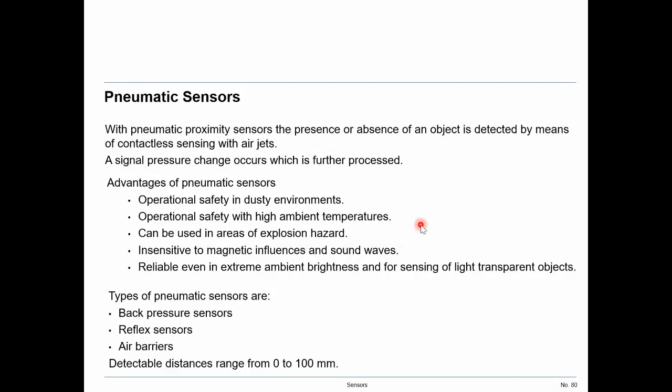Of course, there are also some types of pneumatic sensors, like back pressure sensors, reflex sensors and air barrier sensors, similar to the optical sensors, but we don't use electric energy in pneumatic sensors. We use pressurized air. The detectable distance ranges from 0 to 100 millimeters. Okay, let's see the pictures of pneumatic sensors.

You see here, this is a back pressure sensor. Here the distance is 0, and P is the pressurized air coming in, and the reflected pressurized air goes out. So in and out, you see pressurized air and the answer, the reflection here. You see the distance is 0.5 millimeter, and this we call a back pressure sensor.

That means there is, let's use another color here, a barrier, and if we apply the pressurized air like this, let's use the color, all right, if we apply the pressurized air to this surface, then it reflects back from here, and we sense the back pressure. So this is the A, and this is the P, pressurized air, and this is the answer for that.

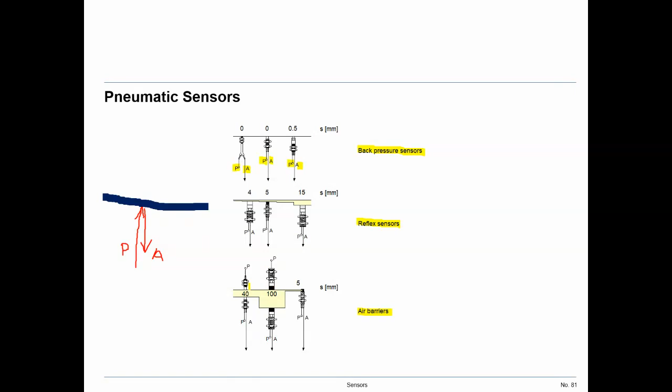And here we have air barriers. That means the sensor consists of two parts. One of them is the sender, the other one is the receiver, or emitter and receiver. So here we have the pressurized air, here we have the pressurized air, but also the answer. And in between, if there's a material, an object, we can detect it.

So let's check the working principle of the back pressure sensor. You see the pressurized air comes in here, like this, and flows to the object here. You see here this sealing element, the seal here, the black one. And if there's an object in front of the sensor, let's say like this here, the pressurized air cannot go through, so it reflects from the object, like this here. So it comes in, there is no way out, and then it reflects in this direction.

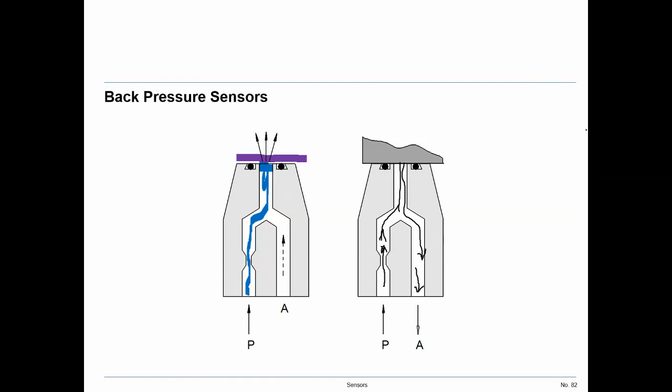So since there's a pressure in that direction, the cross section here is reduced because the pressure cannot go back. So we need the pressure here. That means the back flow in the back direction has a resistance; it's difficult to flow in the back direction. So it has to flow in that direction, and if it is flowing in that direction, using a sensitive membrane or any pressure feeler, we can detect that there is an object in front of the sensor.

So the back pressure sensors we can also use for applications where we want to check the level of water or any fluid. If, for example, the pressurized part of the sensor is in the fluid, then the air cannot flow easily. So there is a resistance coming from the fluid. So then the pressure can immediately come back and go in that direction.

So then there is a pneumatic-electric converter. That means the pneumatic signals are converted into electric signals via the contact here, the open contact. So then we can get signals that there is an object which doesn't allow the pressurized air to flow. So in that way, using this principle of the air, we can check whether the water has arrived at the maximum level or not. The level of the water can be checked.

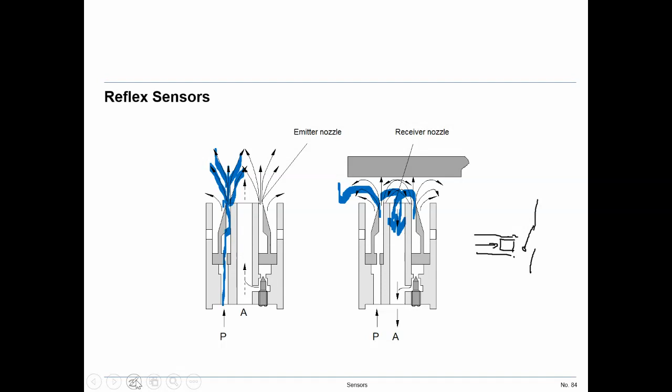And of course, we can convert the pneumatic signals into electric signals. It is also not difficult. There is a converter like this. We have here our pressurized air, and this pressurized air can operate a piston like this, and then the piston can operate a contact like here, a normally open contact. And let's use the red color here: 24 volt direct current plus, and here we have the signals going in that direction.

So if the pressurized air operates the piston, and the piston is connected somehow to the open contact, then it gets closed like this, and we get the signals. That means we convert the pneumatic signals into electric signals. Because in the control system we cannot use pneumatic signals. In the control system we have electricity and 24 volt control voltage. So therefore, if we have to use the signals in the control system, they must be converted into electric signals.

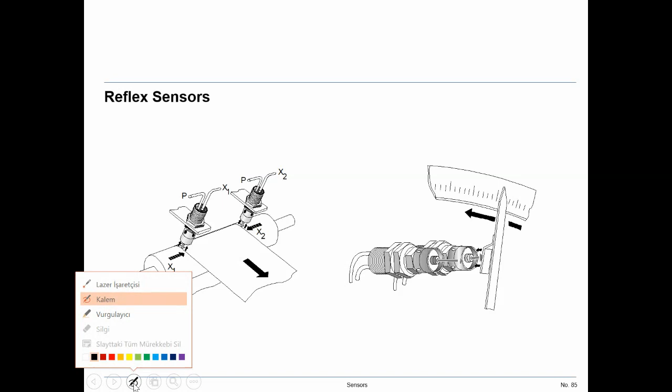So here is an example for the reflex sensor. As you see here, there's a reflex sensor. Like this here, there is paper or anything. Here you see. Okay, here. This is the paper or sheet metal, could be sheet metal, any flowable material like this. And we have sensors here.

So those are our sensors here located. The sensors, and you see if there is a problem with the axis of this rolling part, like this is the axis here, you know, this going through here.

So the axis must be really horizontal. So that means if you have a problem with the axis regarding the parallelity, so this is the axis here, and regarding parallelity, that means the band can move in that direction or in that direction. And this is not allowed.

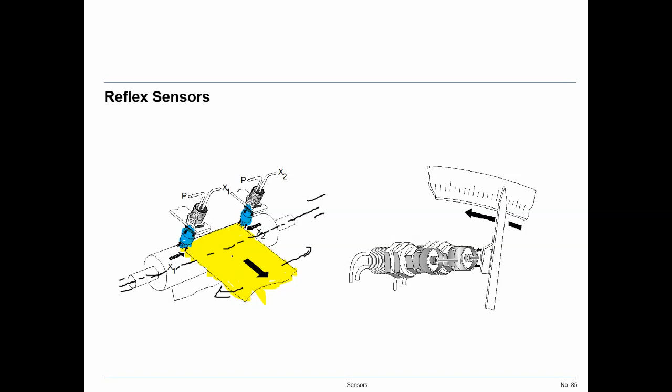This we don't like. So therefore, the two sensors are checking the edge of this sheet metal or the paper, and that means the sensor has to check the edge of the paper or the material flowing, and this also.

So then, if, let's say, the paper or the sheet metal moves in that direction, then this will give signals and say, I don't see the material. Or if in that direction, this sensor will give the signal and say, I don't see the material. So in that case, we can adjust this axis here.

There's a mechanism, and this mechanism can adjust up and down. So in that direction, it can adjust the position of the axis so that the material, say the sheet metal or the paper, can flow properly. Okay.

So the air barrier, another pneumatic sensor is the air barrier, like you see here. Air barrier, and the air comes in that direction here, this is the pressurized air and can flow back in that direction here, and the same here, in the opposite direction.

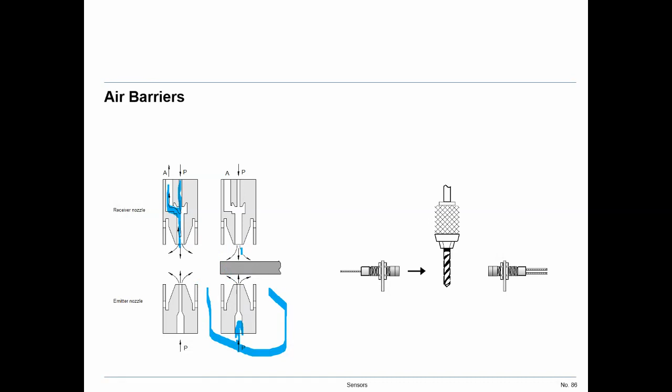That means the sensor consists of two parts. In this part, we have the pressurized air coming in, and the pressurized air can go through here. So if there is an object here, it cannot go through, so then we can check it. It is like the light barrier sensor. And we can use these types of sensors, for example, to check any object. Is it broken or is it okay?

So you can imagine we can put the heads of the sensors opposite to each other, and then if this part gets broken here somewhere, the communication between sensors is established, so then we can understand that there is no object in between, so the receiver can get the sender's signals. So then we easily understand that, in this example, the tool is broken.

Okay, so once more, pneumatic sensors we use mainly in a problematic environment like dust and heat, and maybe electricity is a problem because of explosion. And in those cases, we prefer to use the pneumatic sensors.

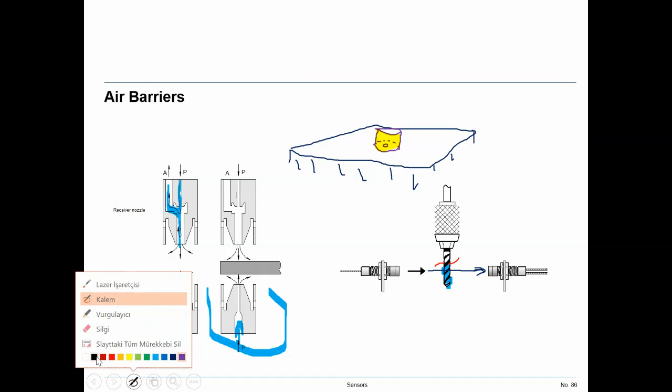And we can use a pneumatic sensor under these. So this is the sensor. Maybe we can use this sensor here, like this one. And the sensor sends the air through here to this material. And if the material is on the surface, it reflects the pressurized air back to the sensor, the back pressure sensor. With the back pressure sensor, we can check whether the material is there or not.

And of course, the surface must be very clean, very smooth, so that we can detect this material with pneumatic sensors. And it doesn't need any electricity. Of course, it needs the pressurized air connected, but doesn't need electricity or hydraulics or anything else. Quite robust, and we use it.

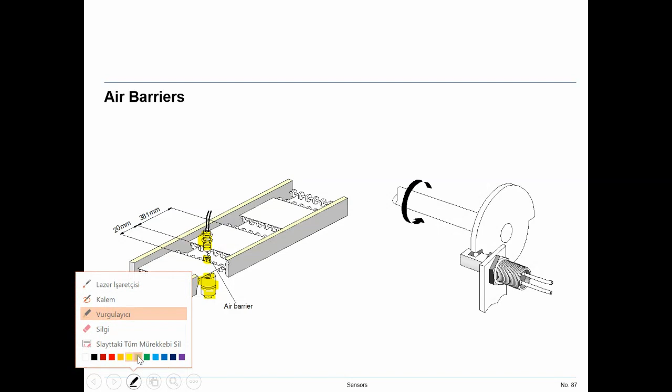Another application we have here. Here you see this is our sensor, the big air barrier sensor. And the other sensor is on the opposite side, in front of this part. So if a sheet metal goes in between, let's say this is the sheet metal here, or paper or anything is flowing.

Then you can easily imagine that the material interrupts the communication between the sensors while the pressure is there. So then the sensor can give signals and say, there is something I detected. It's also a way we can use the pressurized air. So those are the materials. Could be sheet metal or paper or anything, depending on the application. Okay.

Here we also use the air barrier sensor to check. Let's say this is a cam, and you see the part of the cam here, like this is the part. So the pressurized air can detect this part.

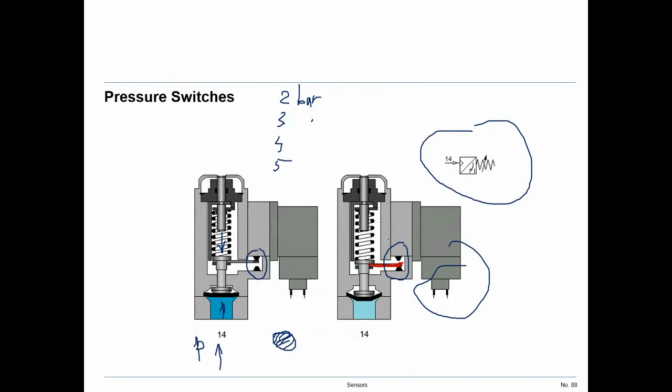If you want the signal at 2 bar, we can adjust it using the arrow, or 3, 4 or 5 bar. So now we will talk about the pressure switches. The pressure switch is also a type of sensor. Therefore you see these sensor symbols here. And you see also the contact here, normally open like this.

It works like any other sensor, but we have here 2 cables, 2-wire technology. One of them is the brown, connected to 24-volt direct current, positive, and the other part is the negative.

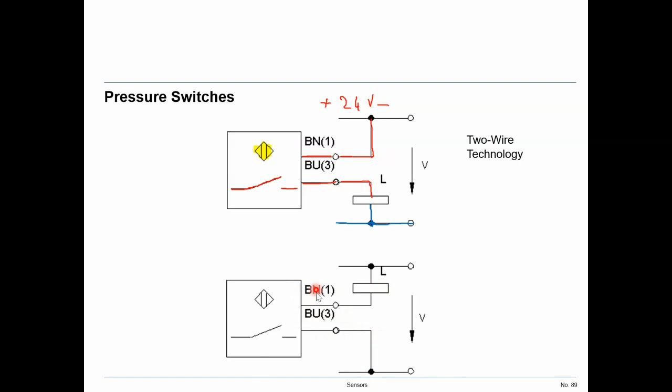And there are 2 types. We can put the load in this part of the circuit or in this part of the circuit. But it's still brown and blue here. Down is blue and this is brown. I mean the 24-volt direct current; the other one is connecting to the earth.

So this was 2-wire technology. So this is important to know, 2-wire technology. That means there are 2 wires here. And next we will discuss 3-wire technologies. 3-wire technologies means the sensor has 3 wires like this.

And the first one is the red one here, like this, brown, 24-volt direct current, and the other one is the blue. So the blue is the ground, 0, and the black is the cable that delivers the signals from the sensors. Let's choose this, the black one. Okay. It's too much, huh? So, it's much better.

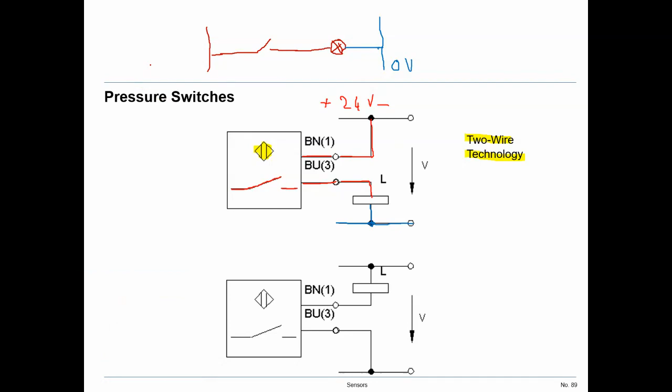Switch means it works with a contact. So we have here the 24 volt connected to the normally open or closed contact, and then it goes through. So here 24 volt, and here maybe you have a light or anything like this. So this is the ground part, 0 volt, and this is here 24 volt direct current, plus. So this is a switch, and the pressure switch works like this.

But the connections, if we talk about sensors like inductive, capacitive, or optic sensors, since they are electronic equipment, they have 3 cables, or 3-wire technology. One of them is the connection to the 24 volt direct current. The other one is the connection to the ground, 0 volt, and the black one. The colors are also standardized, so the standard is also important. The black one is for the signals.

If the sensor is active, if the sensor detects something, the sensor delivers the signals, and then we use these signals, for example, for the coil or any other object. And there are 2 different types of 3-wire technology. One of them, I'll show now, is PNP normally open. As you see here, this contact is normally open. What is PNP? That means positive, negative, positive. So here the load, the object, is connected from the positive to the ground.

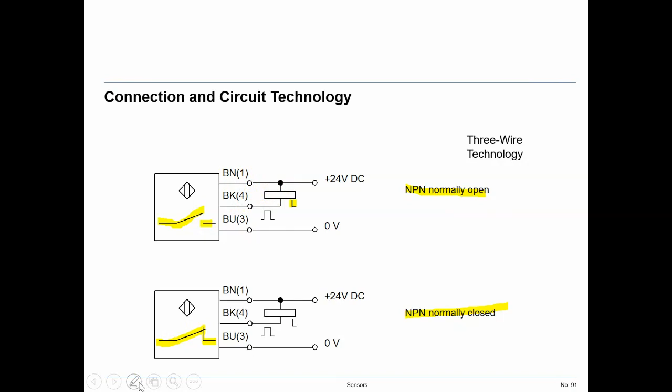So that means between brown - let's choose this color brown, we have the brown. Okay, this is the black, and this is the blue. Blue we can check here - this is the blue one.

So the load, I mean the object, could be a coil or any light and so on. It must be in between 24 volt and the black cable, signals cable. And here also the same. But what is the difference in between?

Here we have normally open contact. Here in these sensors, we have normally closed contact, as you see here - normally closed contact. So against three cables: the red one, blue one, and the black one. And the load is connected, in this case, between the black and the blue.

Here, use another color, it's important to use it in between here. You see the coil or the light has to be connected between black and blue. So in NPN, between 24 volt and the black; in case of PNP, between black cable and the blue cable. So this is the main difference.

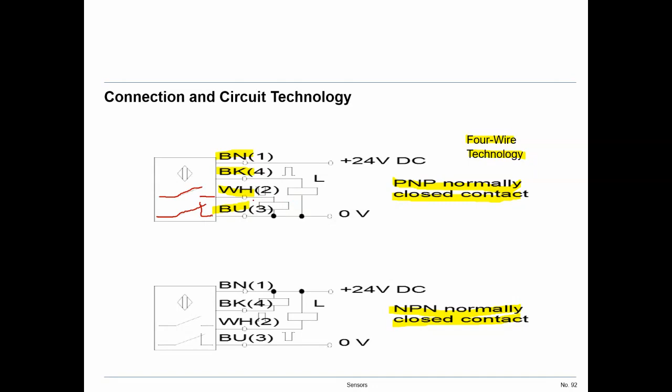So that means if we use the normal open contact, then we have to use the coil or light - this is for normally closed contact, and this is for normally open contact. So if we use normally open contact, we use the cable black, brown, and blue.

If we want to use the normally closed contact, we have to use brown, white, and blue. So brown in any case, because this is the 24 volt direct current. And for the normally open contact, we use brown, black, blue; and for normally closed contact, brown, white, and blue. So this is the same here.

And this is PNP, and this is NPN. So you see where we connect the load - the coil or the light - the location changes depending on PNP or NPN, positive-negative-positive or negative-positive-negative. But if we have 4 cables, the reason is we have 2 contacts at the same time in the same sensor - one of them is normally open, the other is normally closed. Depending on the expectation from the control side, we can use normally open contact or normally closed contact, or both of them as signal elements.

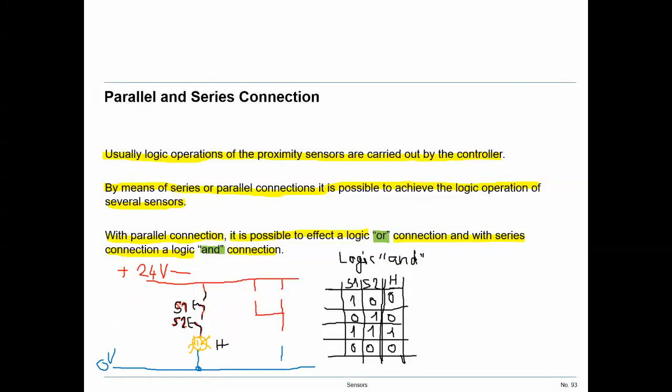What means OR, and how is the circuit regarding the OR? We can say, okay, let's use that. We have S1 here, S2 here, and we connect all of them. And here somewhere we have our light, and then the blue connections here, like this. So our light is somewhere here located. This is the H, light.

And here our push button, normally open contact of course, this is S1, and here again, normal open contact, push button, S2. So let's create a table here, and let's have 1, 2, and 3. So this is our S1, and this is our S2 button, and this is our light.

So again we have four different situations, like this: if S1 is pushed, that means it's 1, and the other is 0. And if S1 is 0 and S2 is 1, or both of them are 1, or both of them are 0, that means not operated, not pushed. So this is logic AND - we are writing now logic OR. Logic OR. So OR.

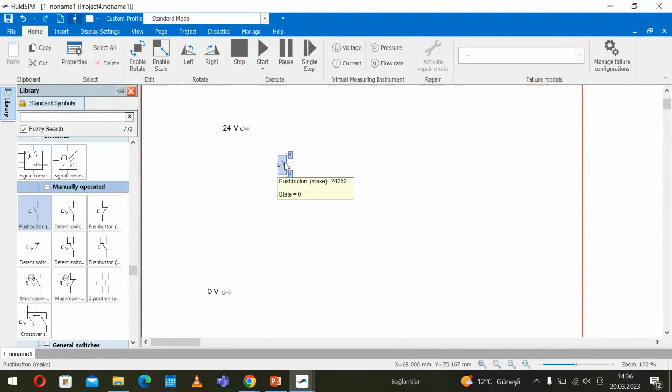Okay, now here, let's establish the circuits. Here we have 24 volt, and here we have our 0 volt. And let's establish the contact. Where are the contacts here? So normally open. And this is S1, normally open, okay.

So let's copy and paste. I hope, okay, S2, right, okay, it's correct. And a light we need somewhere. Light, where is it? Here, okay, indicator light, okay. Ah, 90 degree turn. Okay, here.

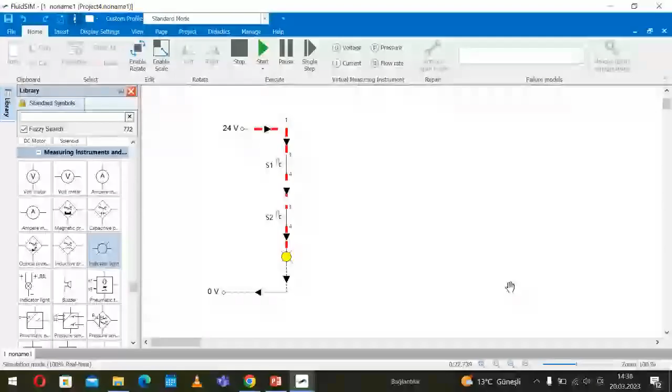And let's connect them like this. We have connected these two signal elements, S1 and S2, in series, you see, in series. So then if you start the simulation, if I push S1, light doesn't get on. If I push S2, also light doesn't get on. But if I push both of them, S1 and S2, you see light gets on. There's one case and there is only one case. So S1 and S2 must be operated at the same time, I mean must be operated to get the output 1.

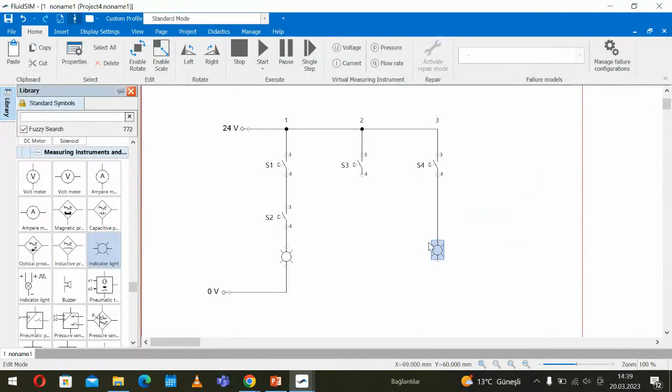But in case of parallel connections, let's use this and let's establish the other, and parallel connections here. So then one more, copy and paste here like this. Okay, here we connect parallel to connect two signal elements, S3 and S4. Okay, and the light has to, we need also the light here, and it's somewhere here. Okay, so then it has to be also connected to here. Okay, and this like this connected parallel.

Okay, let's see what happens. So in case of OR connections, here we have OR connections. One of them is enough of these signals, S3 and S4, to get the light on. So you see, if I push this button, light gets on. S4 is not operated. If I push S4, light again gets on. So this is the OR connection, S3 or S4. One of them is enough to get the light on. But if we connect in series, two of them must be operated. One of them is not enough to turn the light on.

Okay, let's come to the PowerPoint presentation. So this is the logic AND table, and this is the logic OR table. It is not so complicated. I hope you understood that.

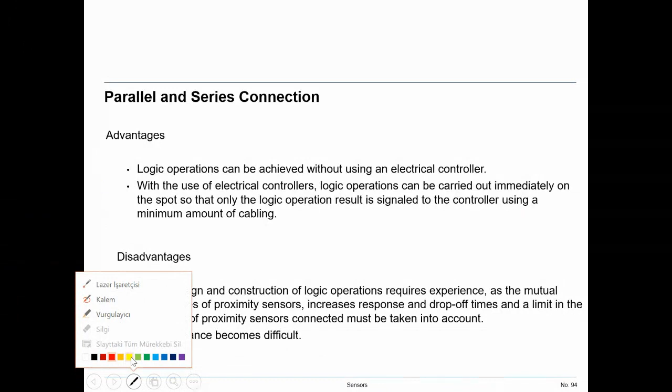Then let's continue. Parallel and series connections. What are the advantages and what are the disadvantages? So the advantages and disadvantages: logic operations can be achieved without using an electrical controller.

With the use of electrical controllers, logic operations can be carried out immediately on the spot, so that only the logic operation result is signaled to the controller using a minimum amount of cabling.

Disadvantages: the design and construction of logic operations requires experience, as the mutual influence of proximity sensors increases response and drop-off times, and a limit in the number of proximity sensors connected must be taken into account. And the other one is the maintenance becomes difficult. Disadvantage: parallel or serial connections.

But in a control system we use, if we want to solve this problem, AND and OR connections, logic OR and logic AND. If you use the contact, we can really realize this logic AND and logic OR, like I have shown in the simulation.

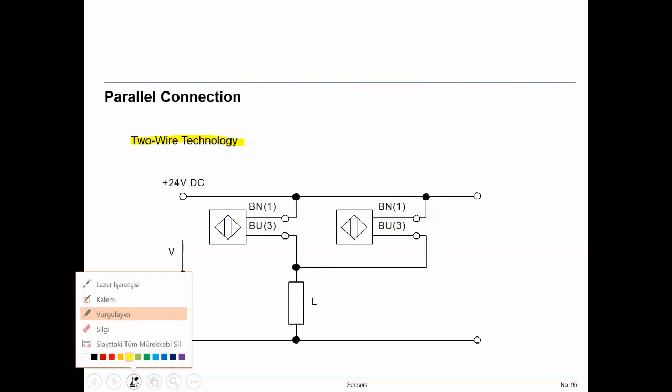So there are parallel connections here. You see, two sensors or two switches are parallel connected. Again, two-wire technology - two-wire means each sensor has two wires. One of them is the red one here, connected to the 24-volt direct current. And the other one is the blue one, huh? So this is the blue one here.

An answer? Let's say this is the sensor or switch 1 and switch 2. If one of them is operated or detects something, and there's a light here or anything else, the light gets on if one of them is operated. And therefore, this is the parallel connection, two-wire technology, parallel connection.

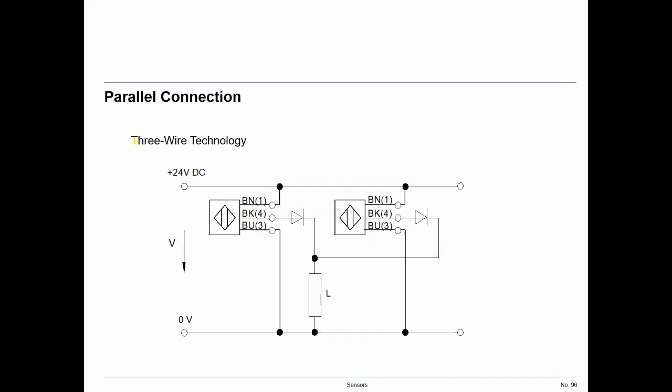So the next one must be serial connections. I hope here, okay, yes. And we have here three-wire connections, you see, and parallel connections. Three-wire connections: here we have the 24-volt direct current, which is connected to the sensor via brown cable, like this, and this is blue connected to the blue one. This is the blue here, you see, and this is also blue connected to the ground.

So, and here this is the three-wire connection. So you know the blacks are the signals coming from the sensors, and if these signals come, the light gets on, like this here.

Let's say this is the light, our light, connected here. So if one of these sensors is operated, delivering the signal, the light gets on, or here if these sensors are operated, the light turns on. So this is again parallel connections, like our previous example. This is 2-wire connections, like a switch, and this is 3-wire connections, like sensors.

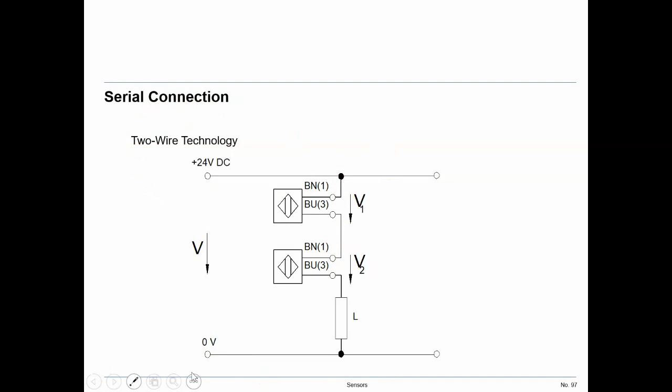Okay, so let's come to the serial connections. Again 2-wire connections, but in serial. What does serial mean? So we have here 24 volts direct current, and this is connected by the brown cable to this switch. And here we get the signal from the switch if it is operated, if it detects something.

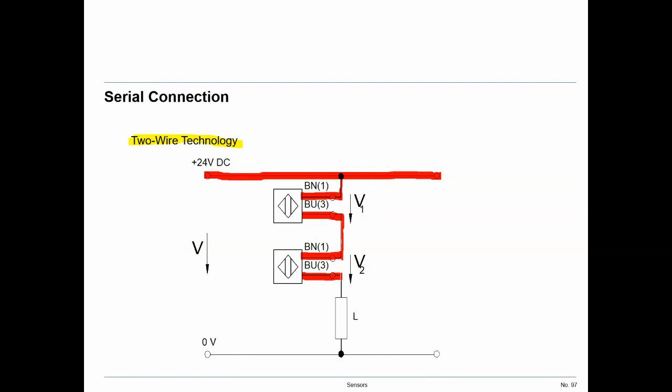It goes to the next sensor or switch, connected to the brown cable, that means 24 volt. And from this sensor, the current flows into the load, into the light, let's say. So this is our light here, and the light gets on, or the coil or anything. And it is connected to the ground, 0. Okay, this is 2 cables in serial connection with 2-wire technology.

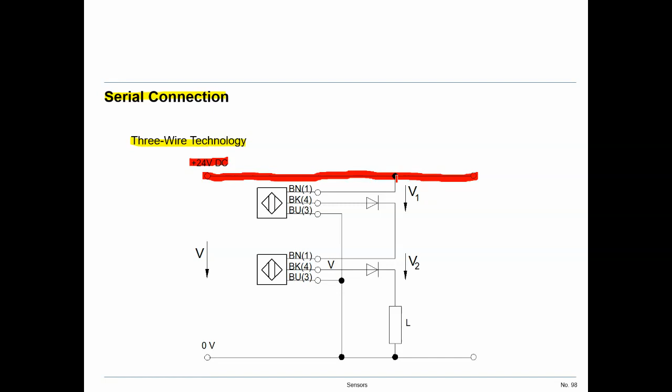Okay, serial connections with 3 cables. Again, serial connection, this is the logic AND, with 3-wire technology. If you have 3-wire technology, how can we connect it? It is also not so difficult. We have here our 24 volt direct current, and this 24 volt direct current is connected by the brown cable to, let's say, sensor 1.

And we get signals from sensor 1. Let's write here sensor 1, and let's choose the color black. This is sensor 1 and sensor 2. All of them are connected to the 3 cables. Let's use the blue color. So the blue one is connected to the ground here, and this is also connected to blue. And this is our 0 connection, ground.

Okay, so you see the signals are connected in serial. Which are the signals here? Those are the signals. As you see here, the signals are connected. This signal is connected to sensor 2 as 24 volt, because if sensor 1 is active, it delivers the signal at 24 volt, and this 24 volt is connected to sensor 2.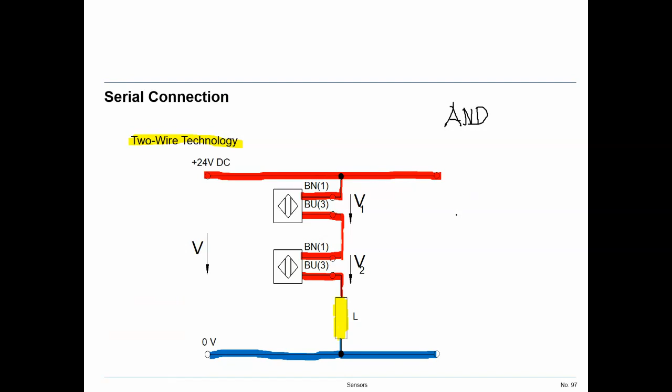This is also an AND connection, 2-wire, as you see here. And this was the OR connection, 3-wire, logic OR, and also OR with 2 wires. So: logic OR with 2-wire technology, logic OR with 3-wire technology, logic AND with 2-wire technology, logic AND with 3-wire technology. Okay.

So, selection criteria. How can we select? They can be selected according to the material which they are to detect. So first of all, detection, of course, we mean the sensors. How can we select these sensors? And it is very essential, actually, in industry. If you start your professional life, you will face those types of problems.

If you are employed in the design department or automation or maintenance or a project, I'm sure somehow you will face the sensor problem, and at least you will be one of the team that has to discuss the sensor application. So sensors can be selected according to the material which they are to detect.

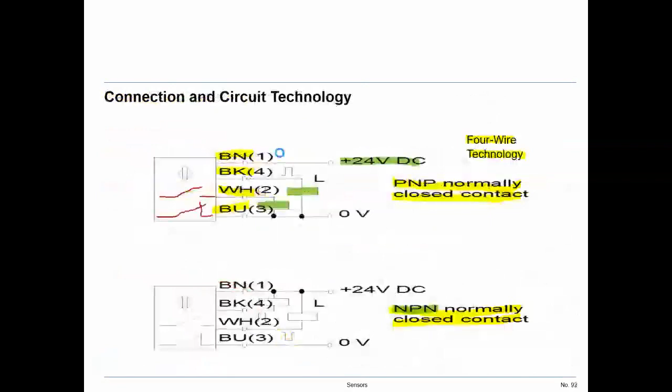Okay, through beam sensors, and let's come to the... okay. Oh.

Capacitive proximity sensors are suitable for the detection of a wide range of materials, but again, only for relatively small distances, similar to inductive proximity sensors.

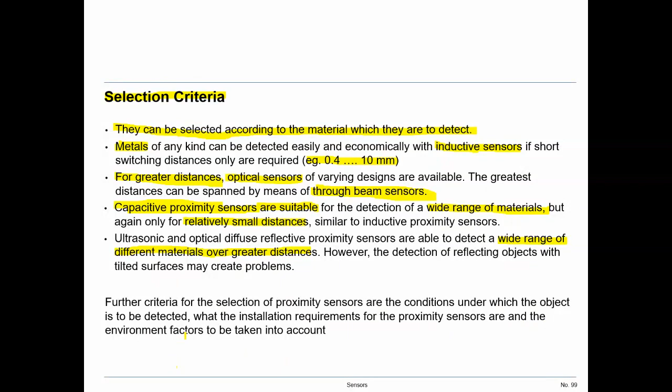Further criteria for selection of proximity sensors are the conditions under which the object is to be detected, the installation requirements for the proximity sensors, and the environmental factors to be taken into account.

So in order to select sensors, if we want to detect a magnetic field, we use magnetic sensors. If we want to detect metal or different types of metal, we use inductive sensors. If we want to detect any material except air, we use capacitive sensors. But we also have to consider the detection distance.

If we have a wide detection distance, then the optical through beam sensor is recommended. The installation requirements and the environment are crucial. So in summary, the selection criteria are: object materials, conditions for detection of objects, installation conditions, environmental conditions, safety applications, and options and features of proximity sensors.

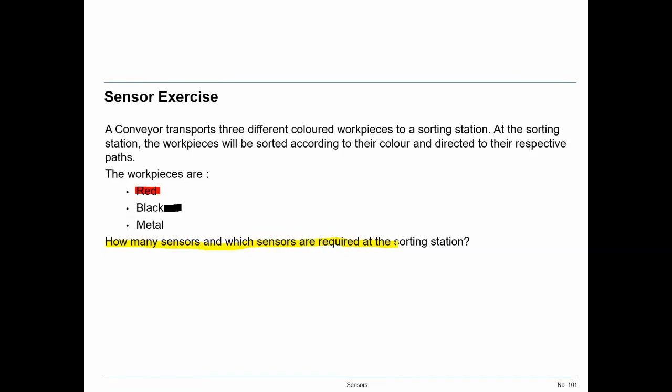And the other one is metal. Let's leave it as metal. So then, how many sensors and which sensors are required at this sorting station? We have to sort the different colors: one is metal, one is black, the other is red. Metal here is the green.

At this sorting station, we have to use some sensors to sort the materials according to which is red, which is black, and which is metal. In the next lesson we will discuss that. I will expect some answer from you, a solution or your idea.

So then we turn to the network. We finished the sensor part, so we start the network. What does network mean? We already discussed the topics actuators and sensors. Now we are in network, and after network we have hardware and software. So what is a network?

You may remember we said, let's have a linear actuator like this, a pneumatic linear actuator, and let's have two sensors on the actuator in order to check the position of this piston. This is 1B1, and this is the second sensor to check the advanced position. This is 1B2, and there is a valve we use to drive this piston. The valve is, as we learned already, a 5/2-way valve.

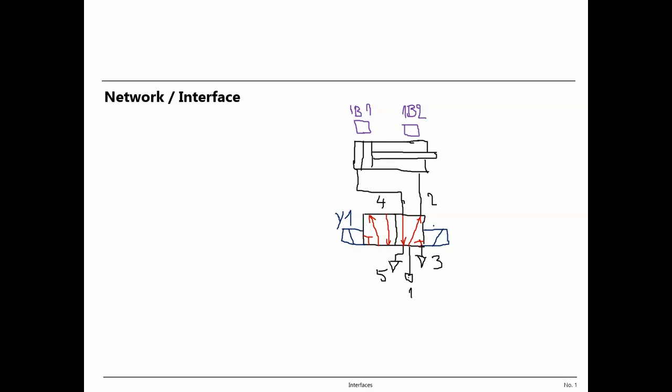Okay, so we need a control system for that. Let's establish the control system. For the control system, this is the power circuit. For that we need 24 volts direct current, 24 volt DC plus, and then we need, of course, the blue line here. This is the 0 volt. Okay, then let's establish the circuit.

If I push start 1, this is start 1, then Y1 has to be connected here. This is the coil Y1. And if I push start 2, let's say this is S1, start 1, and this is S2, this push button here, then coil 2. This is the coil symbol, and another coil here, this is coil 2, like this. And this is Y2, coil 2, and let's establish the connections using different colors.

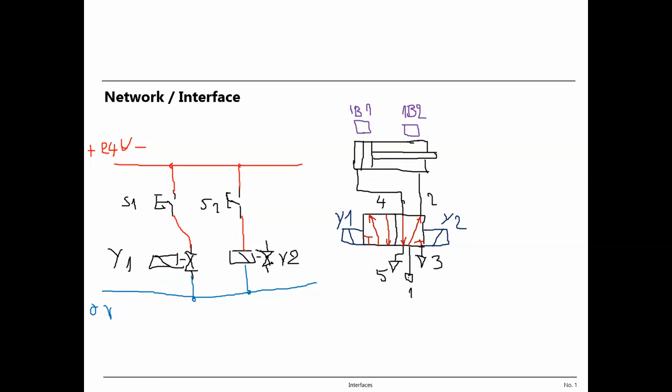Let's say the red one for the current, and this is also the current here, also connected here and there, and we use the blue color to connect the ground here. Okay, so if I push S1, Y1 will be active and the piston moves forward. If I push S2, then Y2 will be active, so the piston moves to its initial position.

And there are signals here, the signals from the coils and from the sensors. The sensors also have to be connected to the circuit, and the sensors have to be indicated here somewhere. But there is not much space. I will do it with the simulation software.

You will see that, and you will see the network. Network means cabling. That means the signal transfer, the way of signals coming from the environment of the machine or going to the environment of the machine. So I'm going to use the simulation software and I will show you that.

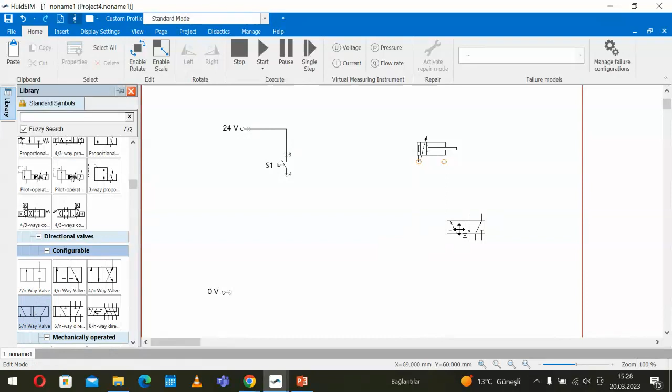Here, so let's take it away. This is not needed. Also not needed. But S1, S2 we need, I guess. S1 we need, not S2. Okay, so this is also not needed. Here not needed. Very fast. I can draw our pneumatic cylinder like this here, a pneumatic cylinder, and add two sensors. Okay, that's the valve to operate the cylinder like this.

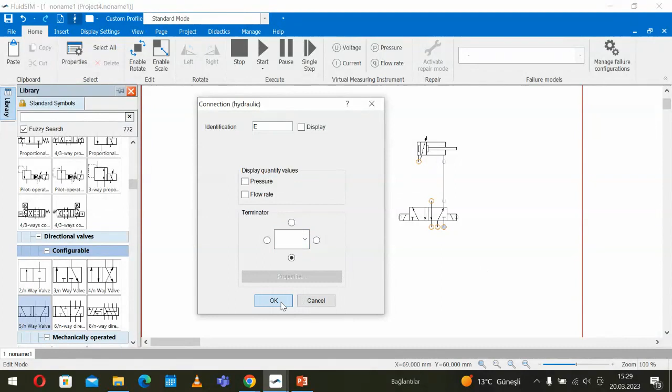Properties, configuration, let's select two coils, and not manual, it must be electric here, also electric. So then finished, and here we need the shock absorber. How was that? Is it hydraulic? Oh, this is terrible. Actually, I wanted pneumatic, not hydraulic. I made a mistake, sorry. I have to use the pneumatic. So then the valve from pneumatic, okay.

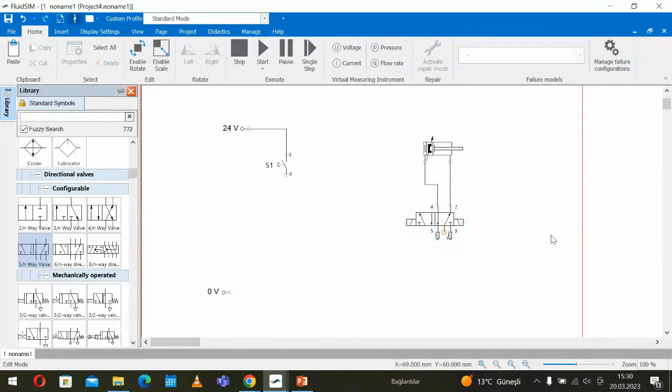So here, properties, configuration, let's say electrically actuated. Then here the properties, this is exhaust 3 and exhaust 5 also here, and this is the air. So let's connect here, there, okay, good. Then move to the side here, and then we need the air source. This is the air source here, and we need also a 3/2-way valve. Where is it? Here, okay.

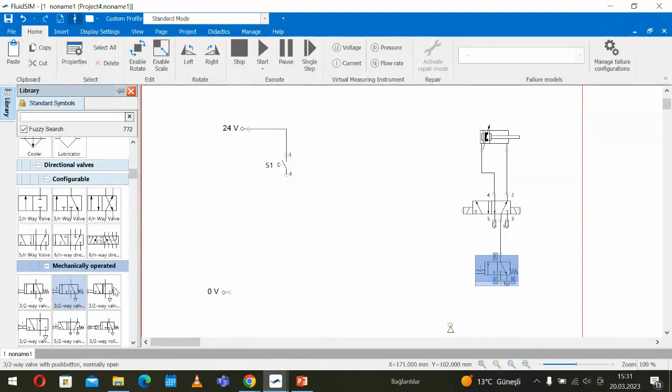To open the pneumatic energy, to operate, open the pneumatic energy, and we need also the service unit somewhere here. The service unit is also important, so it has to be connected to the service unit also. Okay, here, service unit. So we finished our power circuit. This is the power circuit.

We have here the pressurized air source, and then service units, and then the turn on, turn off switch, 3/2-way valves to turn on or turn off the pneumatic energy. So those are the coils to operate the system, and we say this is Y1. So the Y1, and this is Y2. We have to address Y2. Address it.

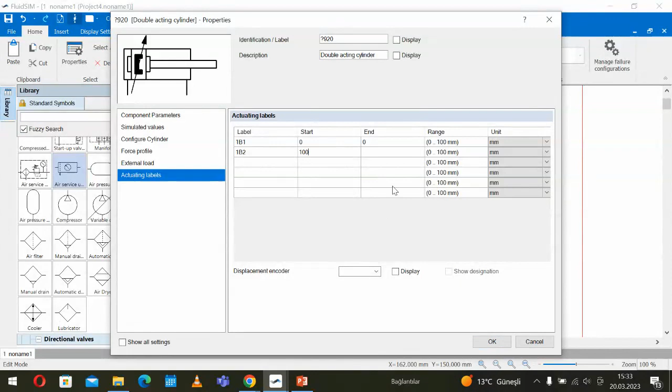Okay, then the sensors we have to add to the actuator, because we have to check the position of the actuators. Label 1B1. It is checking the position, 0 position. Okay, and then 1B2 is checking the advanced position, 100. Stroke is also 100 here. So then we have the sensors also here.

Then let's establish the circuit diagram now, the electrical circuit diagram to control it. So we have here the start signals. Somehow we need start signals to start and stop. But we have also sensors here. So then let's use the sensors. Where can we find the sensors? Somewhere. Okay, here, not.

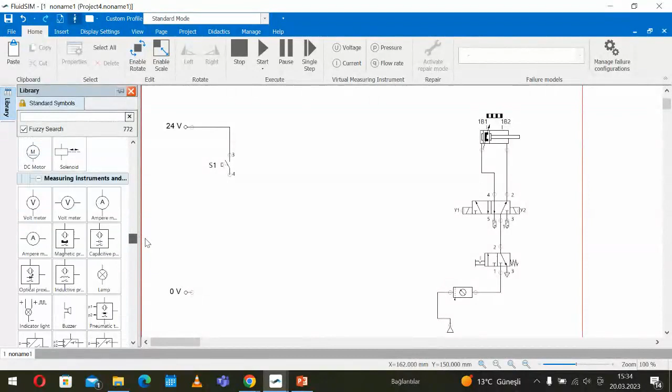Okay, here we have the magnetic sensor. You see, 3-cable sensors. Cable 1, and this is 1B1. You have to give the name. This is 1B1, okay. And we can select PNP or NPN. We select PNP, okay. Then another sensor here. This is 1B2, okay, and it has to be connected to the brown cable. That's the positive 24 volt, also connected, okay.

So let's get closer here, and then I need more space here, therefore here a little bit, okay. So then this is the blue line, okay.

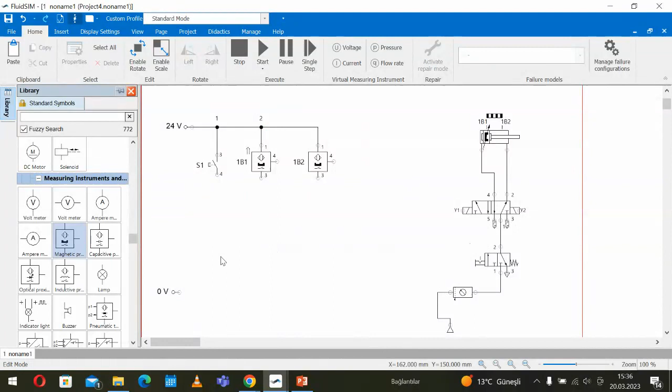So then the signal element. Relay, we already talked about what a relay is, so I need here the relays. Here, the relay coil, so then my start signals come here, and I operate the relay here. The relay has to have a name, let's say this is K1. First relay, and I need one more, this is K2, second relay, and I need once more, this is K3. I have to give the name, okay, K3.

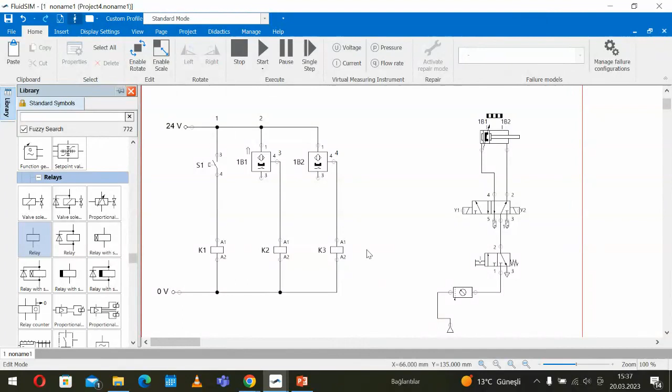So then for all these signals I need a relay. These signals have to be connected here, and then from here to the blue line. Also here, the signals have to be connected here. This is the signal cable of the sensors. And also here it has to be connected. And the blue line has to be connected here, and to the ground.

It's also okay. So actually I can move it a little bit to the side, okay, to the side, and also this here. So it seems nice.

So then I have to decide in which conditions the cylinder has to move forward and in which condition it has to move back. I would like to say, if the cylinder is in the initial position and I push the button, the cylinder moves forward. And if the cylinder arrives at its final position, the piston has to come back. So therefore, for Y1, I need normally open contacts in series. We already discussed series connections and parallel connections.

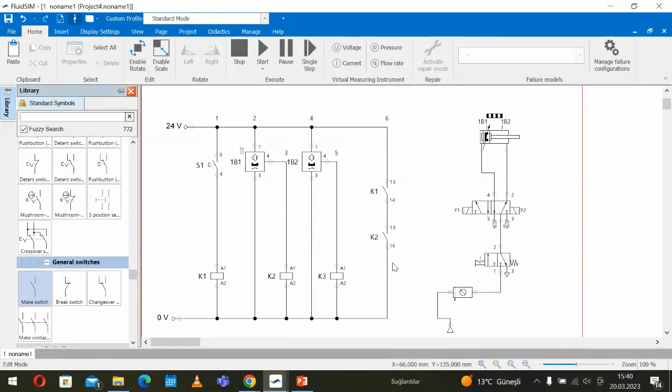So why? Because my expectation from the control system is, if I push the start button, the piston has to move forward. So something is missing here. What is missing? The coil of Y1. So where is the coil? You have to find the coil. Where are the coils? Somewhere here, valve coils. So let's put it here.

Valve coils. And I have to give the name here. This should be Y1. Properties, okay. Y1. Y1 is also defined here. Y1 is also defined, okay. Here I need a little bit of space.

Okay, then the second, we need, this is circuit 1, circuit 2, circuit 3, and circuit 4, 5, and 6. I need once more. That means if I push the S1, the K1 coil will be operated, and the contacts of K1, normal open contact, get closed. And this will get closed.

And if the piston is in initial position, that means the 1B1 sensor is active. If it is active, then K2 is also active because of these signals given by the sensors. So K2 is active. That means the normal open contact gets closed, and Y1 gets signals. If Y1 is activated, the valve takes this position and the piston moves forward, to the advanced stroke. And we will see if it will work in that way.

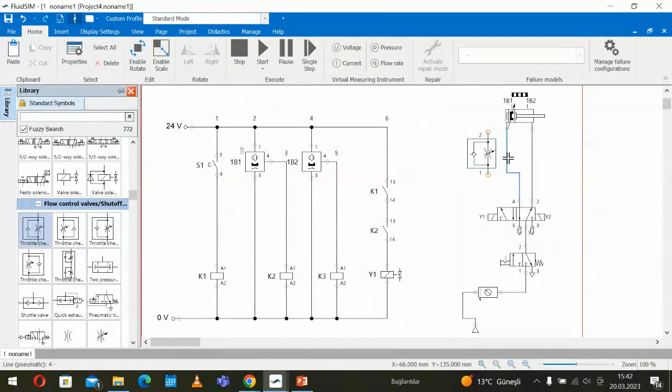Take it in that direction. So here I need also some valve to control the speed of the cylinder. One-way speed control valve, where is it? Here. So this is the one-way speed control valve. Let's use it here like this. Oh, I have to rotate 90 degrees. Okay, then.

So, okay. So then maybe one more here, same. And then we are able to adjust the speed in advanced stroke and in return stroke. Where is it? Copy and paste here. Okay, here. Connected and here connected. So it's also okay. So then the second line here, we need a little bit of space here.

So it's okay. So the Y2 will be operated only if 1B2 is active. If 1B2 is active, that means this piston arrives at its advanced position. Then 1B2 will be active, then K3 gets active, and I need the normally open contact of K3, and the coil here, this must be Y2. Properties, this is okay, Y2. Okay, and this is also connected here.

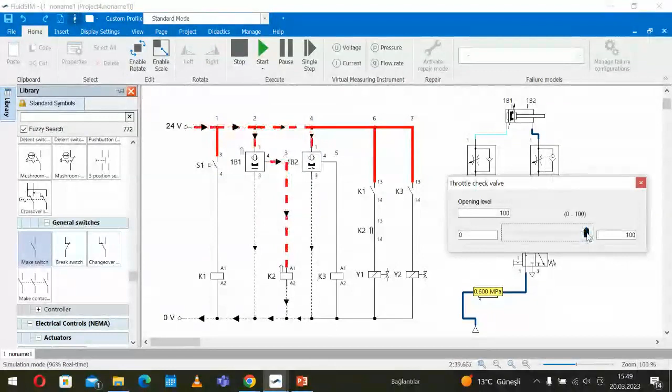So then I reduce the speed a little bit so that you can follow the motion. Let's do it. It moves forward and automatically comes back, you see. So for the return stroke, I have to open it a little bit.

Okay, so then maybe this is okay here. So, you see, now we have an actuator, a linear actuator.

We create a linear motion. We can use it, let's say, to lift a load in a certain position, or to open or close a door, for example, or any mechanical part, to push and to pull. In order to check the position of the linear actuator, we use the sensor here, the position sensors.

Those are on-off sensors, meaning the signal is on or off. The magnitude is not important. We are interested to know, is it 1 or 0? That means, is it existing or not existing? And these sensors we use in our control system, you see here.

All these signals from the control unit to the machine, or from the machine, like the sensors, to the control unit, need a certain way, that means a cable, to transfer the signal. This is the network, to transfer the signals. Today the network is a very important issue. We have very modern network systems used in industry nowadays, like Profinet or other types of communication systems, industrial communication channels, the networking of signals.

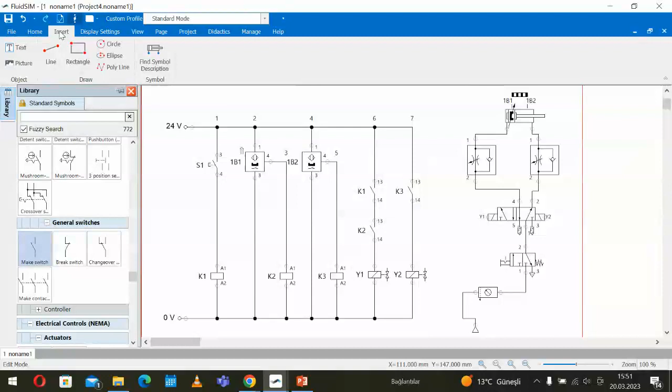And so I will show you something more here. You can easily insert a rectangular here, so let's say the rectangular here. So those are the input signals, you see here in this section. So can we do something here? Properties, color, no color.

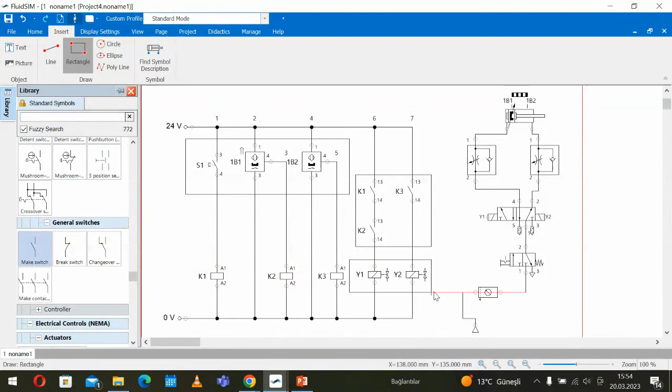There's only one signal, and this is our output signal here. You see, this is our output signal. Output signal means the signal is going to the machine, huh? Y1 and Y2.

So we have three important sections. One of them is input signals. The other is signal processing, meaning the logic part, how we connect the signals to create the output signals. And here we have the output signals. Very important, very interesting actually.

Later on, if we talk about hardware and software, you will see in hardware we will use another way. I mean the hardware, the programmable logic controller, will have an input module, an output module, and a signal processing module. I am showing you here a simple example of what the input signals mean and what the output signals mean. Output signals are the signals on the machine, like the coils, or the relays, for example, that's also part of the output signals, and the signal processing part here.

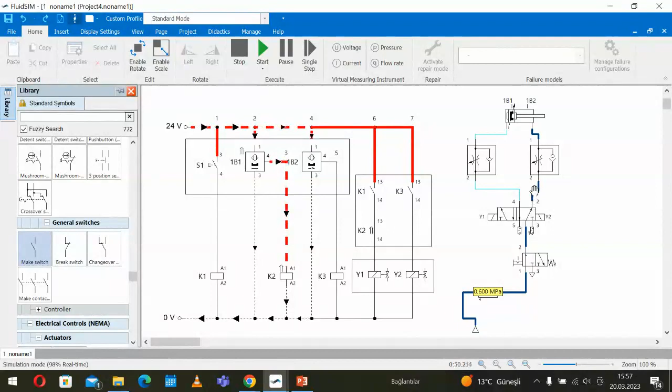Okay, let's come home and operate once more. You see the output signals here, and if I push the button here, first I have to turn on the pneumatic energy, and then if I push the start signal, the piston moves forward and automatically comes back because it is touching the advanced stroke sensor B1, B2, and then 1B2. You see here 1B2 activates the coil K3, and K3 has a normal open contact here in this part, and then the normal open contact gets closed, and Y2 turns on, and then the valve takes this position, and the piston moves to the initial position.

So I will change something here. And how can I do that? I can add a start and stop in this circuit. Okay, I can add start and stop in this circuit, like so.

Okay, now let's move to the side here, and this also here, and I can move in that direction like this. So, and this also I have to move to the left. Okay, so I will add something here.

Now you will see. And this is the start, and I will add something more, a stop signal here. Start and stop signals. And the stop signals will be the same like here. This will be the stop signal.

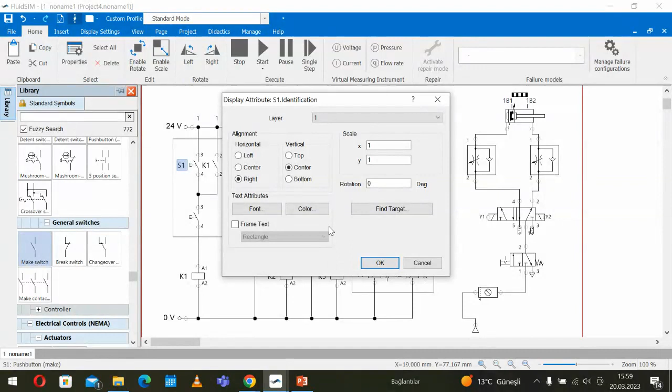Let's see, where is it? Okay, start. This is start, our start signals. Okay, and this is our stop signals, must be. Stop signals.

Okay, so you see now, let's start. Open the pneumatic energy, and I push the start button.

What's happening here? Something is wrong. Okay, I made a mistake.

I have to use a normally closed contact. Normally closed contact is okay. So can I change it? Properties. Normally closed. Simulation, no. Simulation is not, I cannot do that. Okay, I take it out, doesn't matter. Let's use the normally closed one.

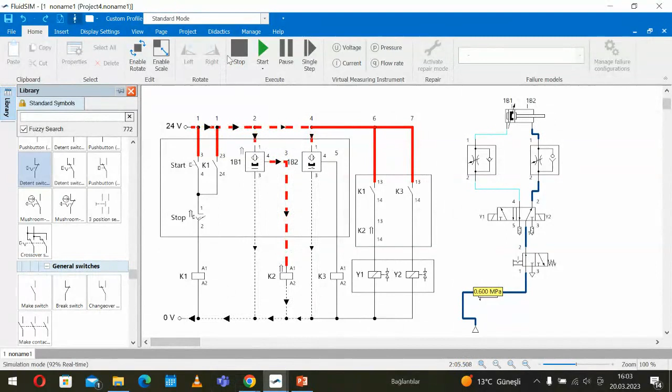Okay, so then let's make a break. After the break we will finalize the lessons for today.

Hello, Doctor. And all these cables, I mean the cables, are the network. Network, that means provide the signals, deliver the signals from the sensor to the control unit, or from the control unit to the machine, to the coils, and so on.

Doctor, okay, my friends sent the presentation on your email. Yes, you mean you are Group C, electromechanical actuators? Yes, yes, Group C. Okay, yes, thanks a lot.

So it needs more knowledge about types of electromechanical actuators. You mentioned hydraulic, pneumatic - there are not electromechanical actuators, there are pneumatic and hydraulic actuators. You have to work on, let's say, electrical motors like synchronous, linear, servo, and so on.

Huh? Okay, then we have to edit it and send it again, or no? So you have to edit it, of course, you have to improve it. Okay, for sure, thanks a lot.

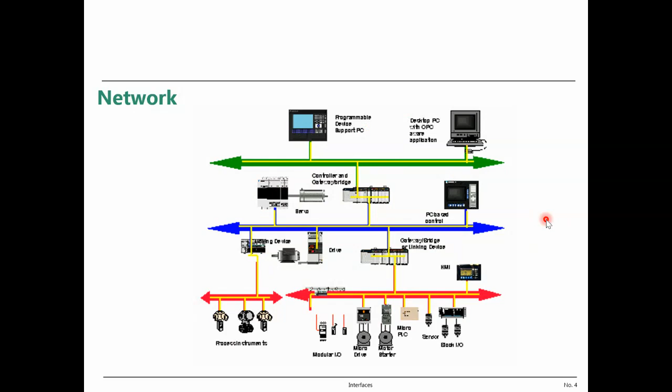And the same here, so there are component networks, control level networks, information networks and so on. From down to the top, information flows up, and from top to down, signals flow down. The network is running, the signals are running over the networks.

So distributed control today is very important, distributed automation systems. So you see there are many machines here. You can imagine many machines connected via the network, and each machine has its own controller to control the work done by the machines.

They produce maybe something, or assembly, or test and so on. So all this information has to flow to the information management system or information analyzing station, and there the information has to be analyzed. By evaluating this information, the necessary important information has to be created and sent to the management, so that management understands what's going on in the shop floor, which machine produced and how much, breakdowns and how long, how many we produced by the end of the day and how many are missing, did we deliver the product to the customer and how much, and are we in line with our targets or not.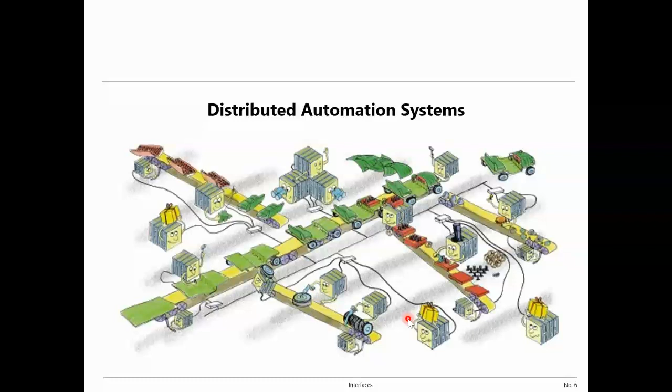All this information has to be connected to each other, and therefore we need a network. You see here the distributed automation system. Distributed means each machine, each unit has its own controller to do its own work, not dependent on the control system of other machines, but they have to communicate with each other, so the data has to flow from the down to the top.

So here we have a computer integrated manufacturing system. This means in the down stage we have the sensors and actuators, and then we have the field bus, which is the communication. This is the signal flowing through the field bus, the type of communication system network. And here we have the signal processing unit, let's say the industrial PCs or PLCs, programmable logic controllers, or industrial PCs.

And here on the top we have the supervisor level. So management information system, management can sit in front of the computer and get the necessary information important for management. But today this is developed, and you can see actually what's happening in the company, not dependent on where you are. You can see in each location everywhere in the world. And this is the comfort offered by the communication system and the networks.

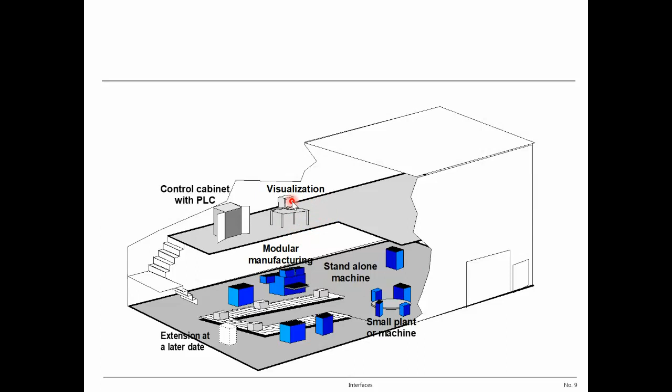And the same here, this is the modular manufacturing or the assembly on transfer band and so on. And here are standalone machines, and here we have the PLC and small machines and so on. All are connected by the network. And in the machine, you can see there are valve terminals. So here are single valves, and here the valve terminals connected by the multipole to the control cabinet.

Here we have the single valve. Each valve has to be connected to the small cabinet, the control cabinet. And here we have multipole. There is one cable, and in this cable there are many cables integrated, and all the cables are responsible for the input and output signals.

So we can say the multipole valve terminals and multipole cable here, terminal strip here, and the wires here in the control cabinet, and the PLC, programmable logic controller, a type of PC, processes the signals. And the same here, but each valve has to be connected individually by the cables. Here we have the multipole.

And this is the development of the communication system, network system, from the past to today. So from the individual connections, we came to the multipole connections, and from the multipole connections, we came to the bus connections, field bus connection. Field bus connection is on one cable. Via this cable, all the signals are transferred between valve terminals or any input-output modules in the field to the control cabinets where we have the PLC.

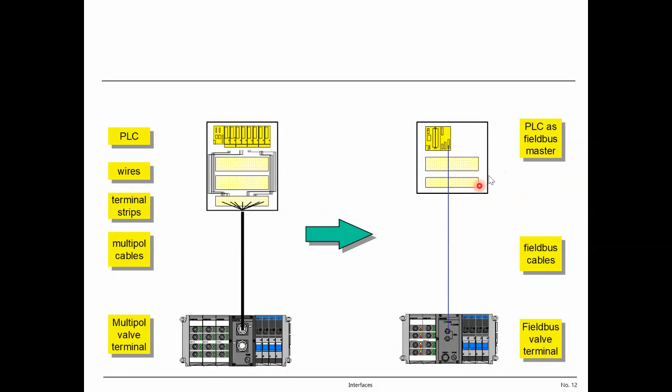So you see the communication systems are changing. And now, you know, today we are also talking about wireless communication. This is wireless. This is with wires, I mean, communication via the wire. Now we have wireless communication, as you know. And there are many network systems in the industry, and it is also changing from one to the others.

We had ASI connection system, that means actuator sensor interface. We had Profibus, we have DeviceNet, we had the open control Interbus and CAN bus. Nowadays we have Profinet and so on. So many signal transferring systems, and generally we say field bus, like a bus, but it transfers not humans or any object, only signals.

Signals are transferred. So since we have many field bus systems like Profibus, Interbus, CAN bus, AS interface, HART and Bitbus, and DIN bus, and Profinet, we have to be able to check their possibilities or properties. So which one can we select or use for our purpose, for our application? So what are the criteria to evaluate a bus system, this network system?

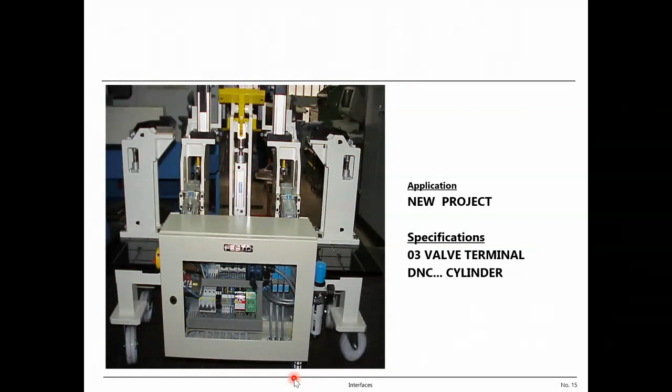Signals are controlled with the real applications. And here we have, again, the one control cabinet. Inside there is a valve terminal. Here you see the input-output module for the sensors. Here we have the valves. And there is a PLC here, and this PLC is the signal processing unit. They control the signals, evaluate the signals, process the signals, and so on.

And in other applications here, there is a fixture produced for a car company, and it's the control cabinet. All the input-output signals are connected from the control cabinets to the field, or from the field to the control cabinets. You see here the terminal strip, and here inside the valve and the input-output module and the control unit, and so on.

And this is also another control cabinet, new control project. So here we have the PLC, input-output module, and the valves, and you see the cables transferring the signals connected here. This comes from the PLC side, and this is from the environment, from the machine.

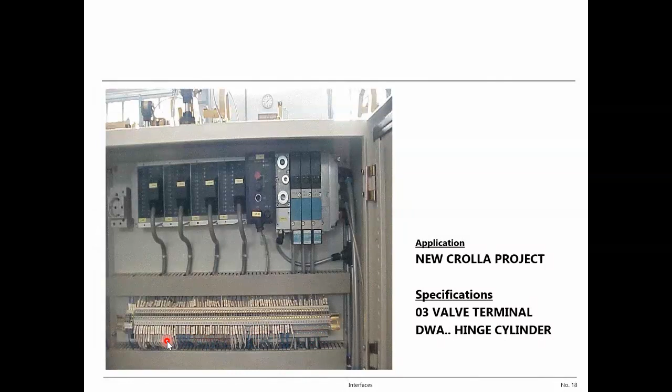And this is also another fixture, the control cabinet here. I guess it was produced for Mercedes. So the cables you see from here flowing into the control cabinets, and the signals from the control cabinets to the environment, where we have the coils or solenoids and so on.

This is a big one, relatively big control cabinet. So we have many valve terminals, mainly pneumatic. We have here the input and output modules. So many signals are connected here. You see the terminal. Here we use the Interbus S. It's another bus system for transferring or delivering the signals.

So another industrial communication system is the AS-i bus, actuator sensor interface. This is mainly used in the band system. The signals can be transferred from the sensors to the controller over a relatively high distance, like 100 meters or more. And each individual signal can be connected to the AS-i cable.

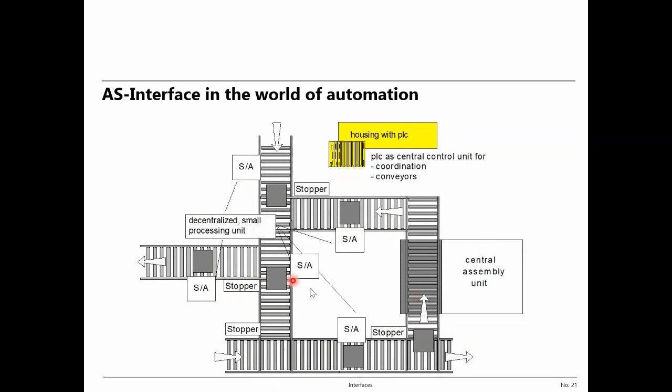It's a special cable, and the cable can transfer the input signals and output signals at the same time, and the energy supply is also involved in this cable. And you see here the circuit for AS-i bus. These are actuators and sensors, station 1 and station 2, many sensors, many actuators, and so on. Here's the terminal, here we have station 3, and this terminal belongs to that, and this is the cable connected via the AS-i bus to the control cabinet.

And we have here the CPU, that means signal processing unit, input-output modules, and all the elements connected, the cables connected, and then from this terminal to the input-output modules of the PLC. Okay, so mainly we say, if we use the AS-i bus, we use less cable. So we reduce the amount of cable.

So this is another picture showing AS-i bus applications. You see the yellow cable, and all sensors and actuators are connected to the cable, and only this one cable is connected to the CPU, to the control cabinet, where we have the AS-i bus module, the master here. That means signals from the CPU go to the field, or sensor signals from the field go through this AS-i bus into the control unit.

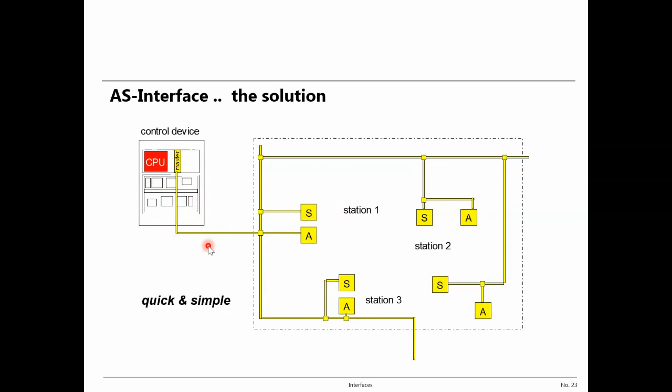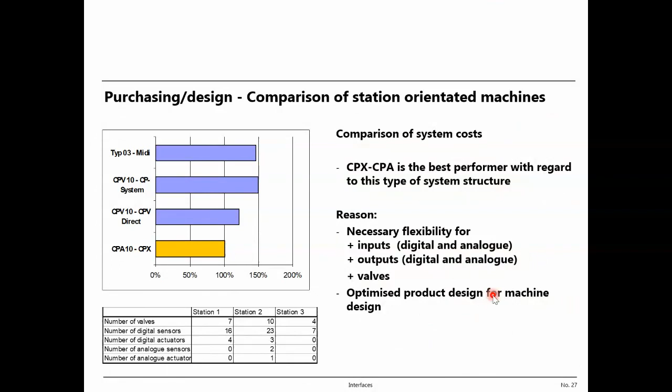So there's another example here, also using the field bus system. With this picture, I want to make clear that industrial communication systems, the network systems, are used very frequently in industry. But there are different types of protocols, different types of network systems, and you should read about it.

And if you later start your professional life somewhere and you're involved in this topic, you should check which type of industrial communication system is used in the company, and who the main suppliers are, I mean, the companies your company works with, and you should get familiar with it.

Okay, again the comparison, and there's a handling system. Even if you have a handling system or a transfer band system here, we deal with many signals. All the signals have to be delivered by the bus system, the network, and of course the safety of the signals is also important, so that we get the signals as they are.

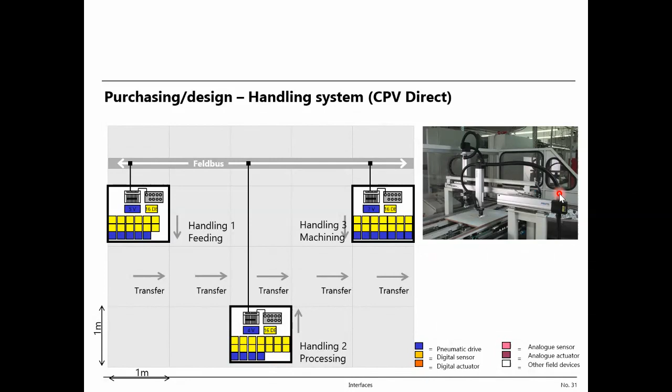And the valve terminals, here you see the valve terminals. There's a bus connection here. There's another valve terminal. Here maybe the input-output modules or the terminal again. That means we can connect input signals, output signals, valves, and so on. And all the signals are flowing on one cable, the bus cable. And another valve terminal you see here. And here we have the terminal with the PLC input-output modules, maybe analog, digital, and so on, connected to the field with a bus cable, bus module.

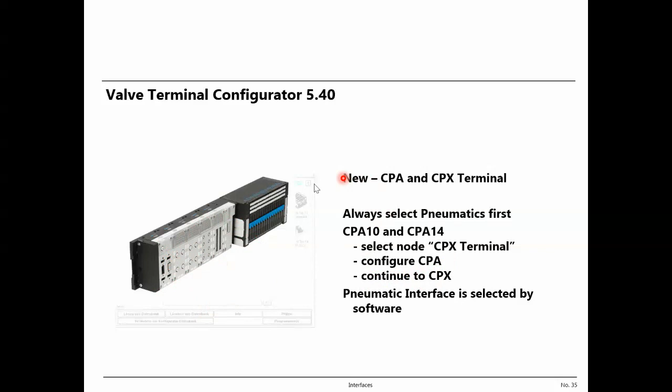And here much more complex. This is the valve part. We have here the pneumatic valves. Here we have the PLC module and output modules and all those things, all in the same terminal. And here much more complex input-output modules and bus modules connect to the bus cable to communicate via the bus system. And the valves here also, that means the outputs are also connected. If we have valves, we have outputs. The coils mean outputs; they work with the output signals. So again, different types of valve terminals.

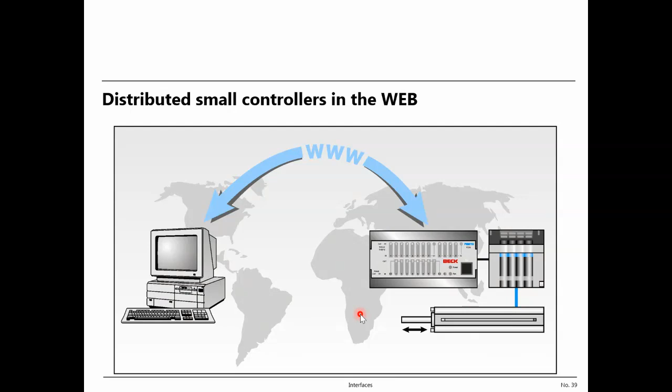Now, distributed control: we have a computer or connection somewhere in the world, and a machine somewhere in the world, and the machine has a controller, and we can establish the connection to the controller. We can get information or deliver something, and get information about the machines, what happened there, produced, not produced, how many produced, breakdowns, how long, and so on. And today we already know this.

Next week we are going to discuss the hardware, and later on the software, and we will finish the principles of mechatronics, the basic components and units of mechatronics. And when we finish all of them, maybe we can design a mechatronic system using simulation software, and summarize what we learned, why we learned it, and where we can apply it.